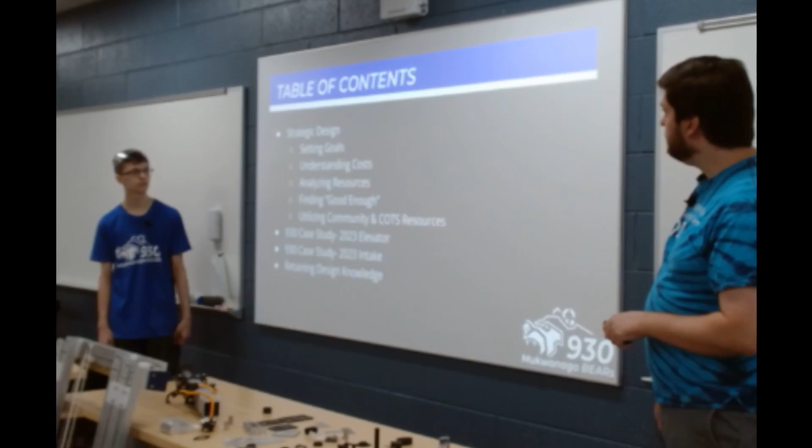So first we're going to talk about what is strategic design, how you can set goals and understand the costs of these goals. Also, analyzing the resources your team has, finding what is good enough for your team, and then how you can use community and COTS parts. Then we're going to dive into a case study on 930's 2023 elevator, and also the 2023 intake. And then we'll wrap it up with how you can retain design knowledge for future years.

Can you guys hear Aylin in the back? Just making sure. Okay, I have bad ears.

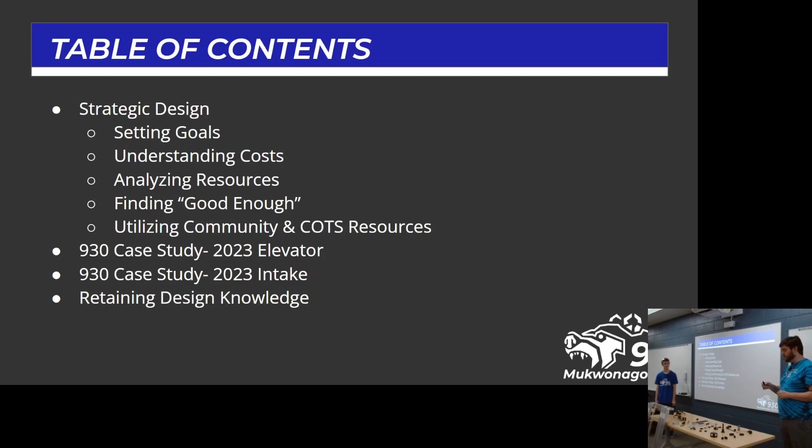Before I go on here, there are a bunch of strategic design presentations out there. Mike Corsetto from Citrus Circuits gives a really great one, and we're kind of going a little bit different than that one. We totally recommend you guys go check out the one from Citrus. This one is a lot more about the process around it.

All right, so strategic design - what is it in the context of this presentation? It's about bringing the right robot to the field. What that means is different for every team. As a team, you are going to be setting goals for what you want to achieve this year. Do you want to have match performance? Do you want to have award performance? Do you want to find that niche as that third robot? Setting these goals as your team and then performing, and then bringing that robot to the field.

It will require an in-depth understanding of your team's resources and a strategic application of those resources. Every team has got things that they're really strong at and things that they need to work on. We'll talk a little bit about some of ours later on, but understanding those and being able to apply them appropriately for your goals, and then managing and evolving priorities based on the now of your robot.

So what this means is every point during the season, the priorities are going to shift for your robot. Every day, things change based on what you learn about your robot that day. I've been saying that part of the build season process is almost discovering the robot that you've been building, understanding what it can do, what it's having trouble with, how it can be improved.

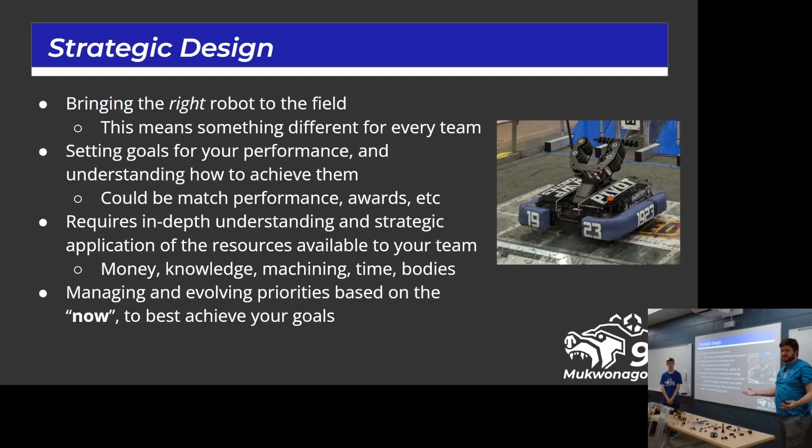Making sure that your robot is moving forward as a whole unit - it's not one-sided. You don't have a ridiculously good intake, but your drivetrain isn't assembled yet, or vice versa - your drivetrain doesn't have awesome auto routines that are fine-tuned to the perfect level. You've got it in 13 seconds, and it has nothing on top of it. It's just a drivetrain. You've wasted a lot of time fine-tuning autonomous mode when it's all going to change in a week when the top half of that robot gets attached. It's about making sure this robot grows as a unit.

One of the first things you have to do is set goals and priorities, and those goals are the guidelines your team will follow and make decisions by. You need to set them as a team and commit to them.

A way our team does this is we have a goal retreat at the beginning of the season, and our leads discuss what we want to accomplish. Before the 2022 season, we decided we wanted to go for the Autonomous Award to complete the hexafecta of the robot awards.

As a result, our robot was very heavily focused on autonomous. We had a bunch of sensors, a lot of focus on our autonomous routine, and metal sensors on our elevator to make it fully autonomous. All of those things allowed us to eventually get the Autonomous Award.

Those goals will drive your priorities. Like I said, going for the Autonomous Award, you're going to prioritize different things on your robot. That will shift at every point in the season, every single day, every single moment, and it will eventually bring you closer to those goals.

Every goal you make is going to have a cost - it could be time, materials, money. You have to balance those things. You also have to wonder if you spend time or money on one thing, does it prevent you from doing something else? Understanding those costs is very valuable.

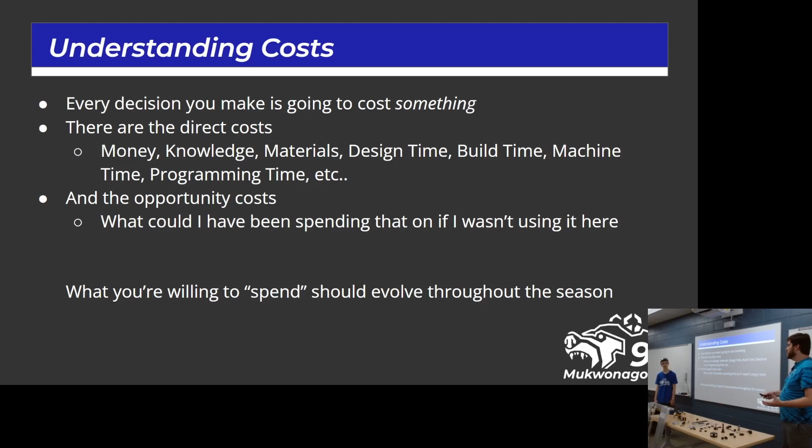Elon's talking about the concept of opportunity costs. If you have your lead designer spending all their time working on designing an ultimate drivetrain, could that lead designer be spent better elsewhere? Especially with the advent of swerve drive, the drivetrain has actually gotten a lot simpler to design - you make a square, plop those modules in the corners, and you're done. But things that are different every season require more experience behind the designer. So where is that opportunity cost you're approaching?

Analyzing your team's resources and application of your resources will define your team's success. Understanding your team's weaknesses and developing strategies around them is one key skill to bring yourself closer to success. I'll use our team as an example here.

For about 9 seasons, we built out of a church basement. Our largest piece of machinery was a drill press from Harbor Freight, and the chuck kind of wiggled when you tried to drill holes, so we couldn't do anything accurately. The first few seasons were interesting.

So we decided to put our focus behind our CAD. To enable this, we found a sponsor in Waukesha that would fabricate sheet metal for us. We could send them stuff and they had a 5-day lead time - we'd send CAD on Monday, and usually by Thursday or Friday we'd have parts in hand. 5 days in a 6-week build frame is a long time.

For context, this was back when you had to bag your robot. So you got kickoff January 6th or whatever, and like February 21st, something around there, you had to be done with your robot. So 6.5 weeks.

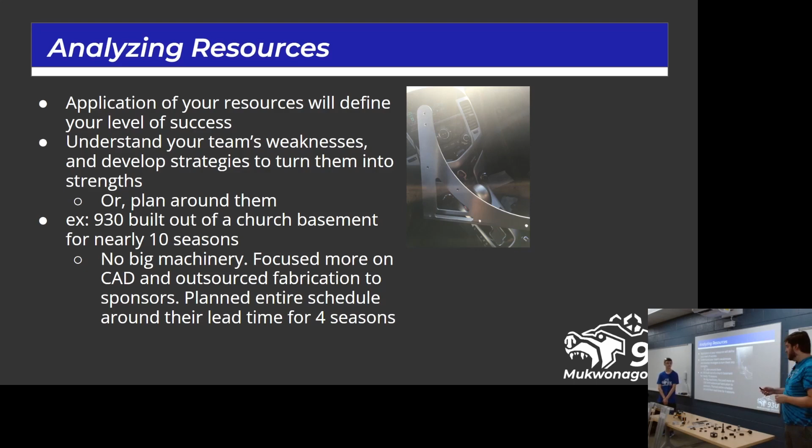This was end of day Saturday. We had to basically scramble to put this robot together because parts needed to be sent out the following Monday - so basically 4 days after this for the final robot. We had to assemble this thing, put it together, and test it to make sure we did everything right.

2017, we didn't - 2017 is kind of why we shifted off of this. It was the wiffle ball year, and the CAD for the wiffle balls was bigger than the wiffle balls actually were, and nobody on the team verified. So we put the robot together, went to put a ball through it, and just nothing touched - no compression on anything. This was end of day Saturday.

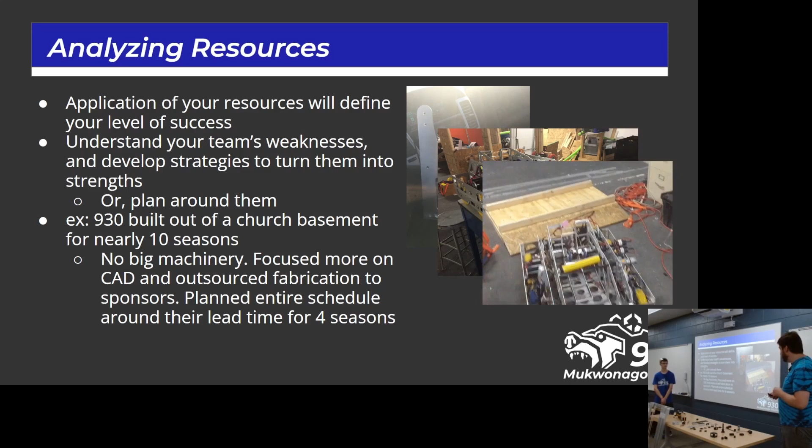We met again that next Sunday, the next day, as well this year, getting it driving and testing it. 2016, if you're not familiar, was a lot of just driving over weird things.

So this was Sunday, we sent out parts, then that next Monday there wasn't a lot to change. Back then we powder coated our robot, and that took another 5 days of lead time. So if you're keeping track, we sent out the full robot Monday of week 4.

We found pictures, didn't put them in here. We got the powder coated parts Thursday of week 6, so basically a week to build, assemble, and bag that robot. Back then, the competition robot never got tested before competition.

It went in the bag, wired, and we opened it up at competition and hoped it was actually wired. This is an example of how our biggest weakness was tooling - we just didn't have the tools to make anything well. So we shifted a lot of our priorities into CAD. These days we have access to a lot more tooling, but that shift from minimal CAD to full CAD has changed the direction of everything we do here.

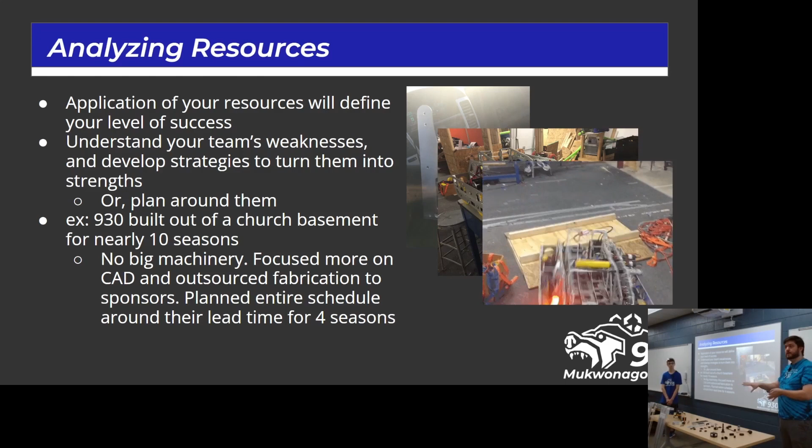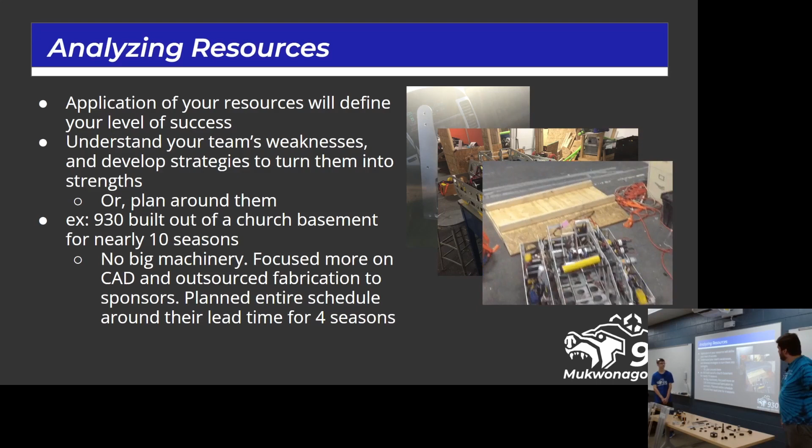So if you take a totally tangential thing from the side - CAD your robots. This is the slide I swapped, so now it's yours.

Like Greg said, if your team does not have the capabilities of fabricating your own parts with accuracy, there's a lot of options out there with commercial off-the-shelf resources. There's, for instance, ThriftyBot - they have components you can purchase with much higher tolerances than you could probably machine. Whenever you're creating a part, you have to ask yourself: is it more worth it to purchase something, or is it cheaper and do you have the capability to fabricate it?

There's tons of resources. There's the EveryBot, which we'll cover in the following presentation after this. FIRST is doing a kit of parts robot next year, and there's also a ton of kits - climb kits, elevator kits, turret kits.

Things Alan talked about before - understanding where you're spending your money, your opportunity cost, where that lies. A big part is cost. There's an elevator kit they sell, and we'll talk more about that because we utilized it this year.

Another part is, like us back then, we had a lot of tolerance issues with the chuck that wobbles, hand tools, and everything. These days, a lot of these companies sell things that allow you to have tolerance issues but still make parts with a nice tight tolerance.

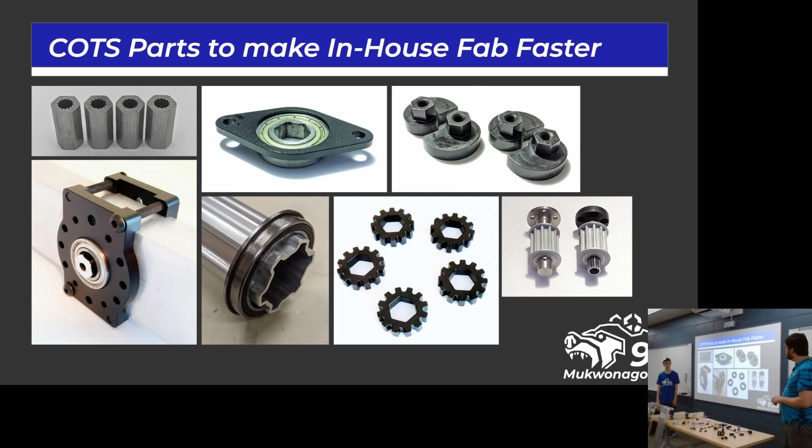Alright, so a big component of how we operate as a team in terms of decision making across the whole thing is finding that 'good enough' at every stage of the build season, every stage of the season. This is a concept of not going too far too soon.

At some point you're going to have to choose between continuing to optimize a feature, like an autonomous mode or an elevator speed, versus moving on to something else. Learning how to determine when something is good enough now, and that you can improve it later, is an important skill - because there's always going to be something you can improve on, but the gains you get are diminishing returns over time.

This is where we start to have some audience interaction. This is fun. When should you stop fixing what broke in the last match and make sure your robot gets to the next one? So in 2019, we showed up to Midwest Regional, our first event.

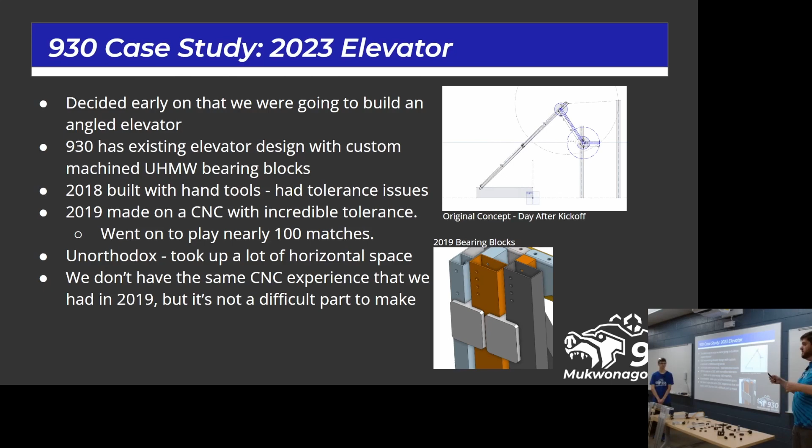So if we were going to make this an angled elevator, we had to figure out, is the plastic going to hold to the forces now being against it? Or are we going to use a COTS solution? Because this year, lots of COTS elevators came out. Thrifty has them, Rev has them, West Coast has them. Everybody has elevator bearing blocks now. AndyMark has them. What do we do?

So for our elevator, we decided the cost was low, the design time was medium. We didn't have any inspiration other than ourselves, so we'd have to figure out and consider how everything's going to act at a 45-degree angle. Also, the space cost was pretty big for this because it's all horizontal, way wider than most elevators.

Machine time had a lot of risk with it, a lot of potential to be way too high because, again, the student who worked on it graduated and has moved on to other teams, better teams, and the mentor is now in California, not over here to spend all his time solely focused on the Haas. So the machine time is risky.

Elevators just need to work, right? They are like a support piece of your robot. They're like the drivetrain, they just should work. They shouldn't be temperamental, they shouldn't require a lot of time and commitment. They just need to work. So we kind of considered it high risk, low reward.

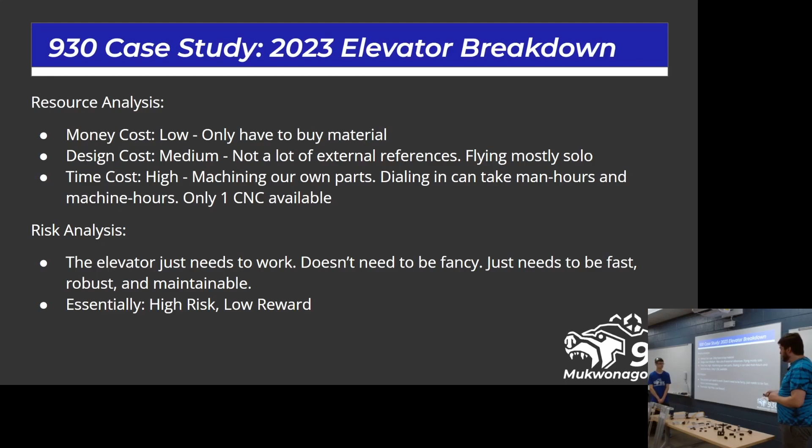So we kind of went to a middle ground. We decided to still design our own elevator, but use COTS bearing blocks. We ended up using the Thrifty ones, which I'm noticing now he actually didn't send us any besides what's on that. So that's cool, I guess. No, it's fine, I'm just joking, if he's watching this.

So we decided to design our own. We ended up modifying them a little bit. The robot's not in here so you can't see, but we wanted to have an open top and an open bottom to our elevator instead of all these cross beams that you see like on this one and on that one. So we decided to just basically add little struts.

Ooh, don't touch the smartboard.

That fully contains the elevator. But that allowed us to basically get the elevator just working and focus on more important things. Let's see if this still works now.

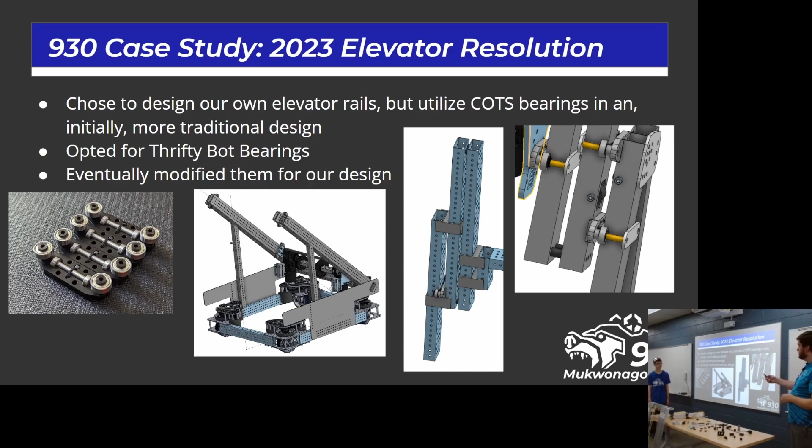Cool, all right, part 2 now, and this is more audience interaction here.

So it is February 11th at 6pm. For all the Wisconsin teams in here, this is a week before Sussex, this Saturday. Sussex was February 18th this year. So for our Illinois team, and I think that's the only one in here, Sussex is our week 0 competition. We have a week. The electromechanical team has dropped this robot onto the practice field and said, all right, this is yours, programming, have fun with it.

And it's there, and so there are a bunch of things. And so this list that we've got over here is kind of the things we need to do now. We have a week to do them.

We need to find all of our positions for intaking and scoring. If you've seen our robot this year, it's complicated. It's got 3 degrees of freedom, which a lot of you guys do, so you might know - elevator goes up, arm goes up and down, wrist goes up and down. We have to verify all of the positions for all of those. We have to make sure they don't run into each other while they're traveling - no safety on this robot. We need to make sure that this intake works.

We need driver practice, because driver practice is one of the core tenets of success. A faster elevator is a better one, another core tenet - if your elevator is faster, you just have one less thing to worry about. And we need to find the weak points in the design so they can be fixed. So basically, we need to verify a bunch of things, we need to drive a bunch of things, we need to test, and we need to break a bunch of things.

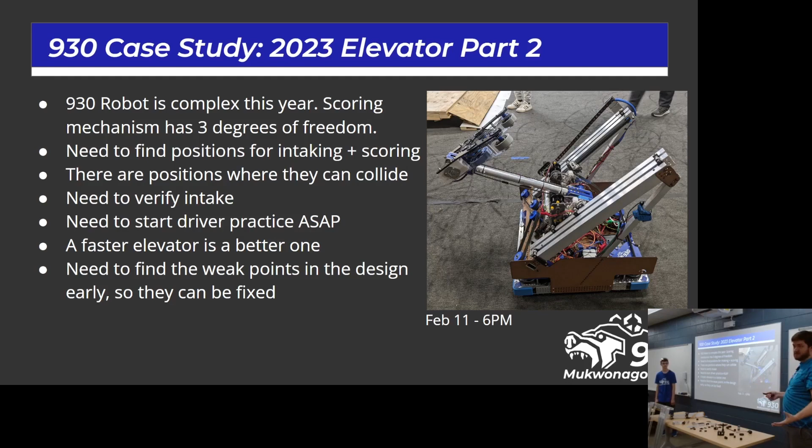Finding positions - okay, you got to verify your positions. The second part of this is programming has had this robot already. They've got logic there, but they have no PID yet. They know their PID will work once they put in the correct values, and they don't know what those are.

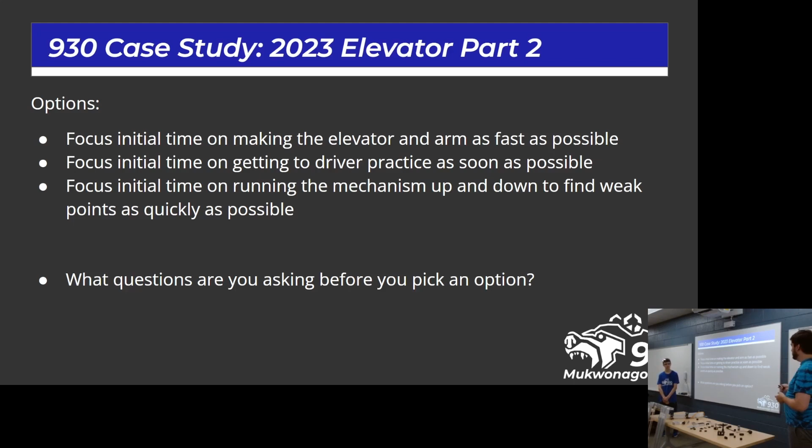So factors we considered, and I've got a bunch of pictures next because this will actually be fun. When in the season is it? Because that list never changes, so at this point you figure out what's important today, not what's important tomorrow. For example, it's not important today to make that arm go as fast as possible—it's going to break, like Jeff said. That robot is going to change significantly, and PID tuning is sensitive to big changes in your robot. So if there's big changes, don't waste your time.

How do we be competitive at our next event? In this case, our next event is Sussex. So we just need to be enough to be competitive at Sussex, which really means we need to get value out of Sussex.

The word will change for your week 0. Really, for week 0, it's how do I get value out of being there? If the robot just goes there and you're fixing it the whole time, you could do that at your shop. So we want to prepare to not have to do that. How much do we want to learn before we break it?

When do we plan on iterating? What do we plan on iterating on next? In this case, we planned on that intake. That intake was our biggest question mark, and we need to know: is it changing, is it staying the same, and what upcoming changes are going to invalidate anything we learn now? That's kind of the idea of, if that top half is changing, don't waste time PID tuning.

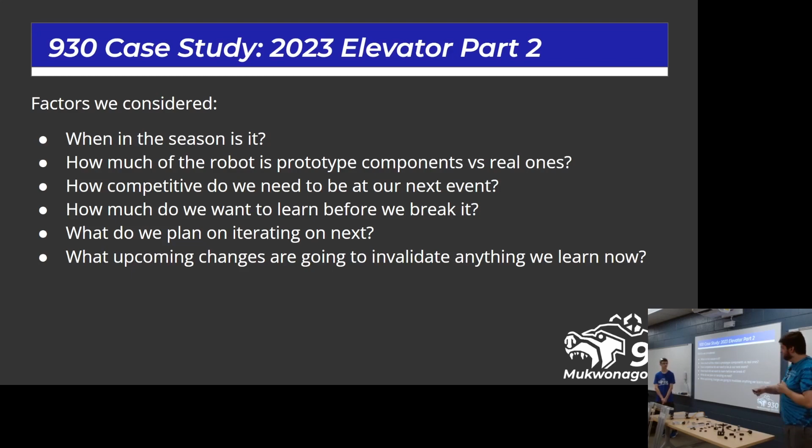I've got some pictures. So like I said, February 11th, that picture was taken at 10 p.m. There's about 2 times a season we meet a little later than usual. One is when we're at big milestones like this. The other is before Sussex.

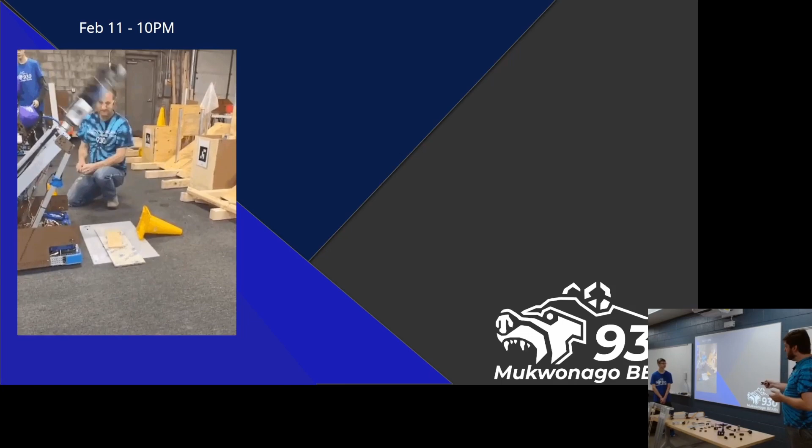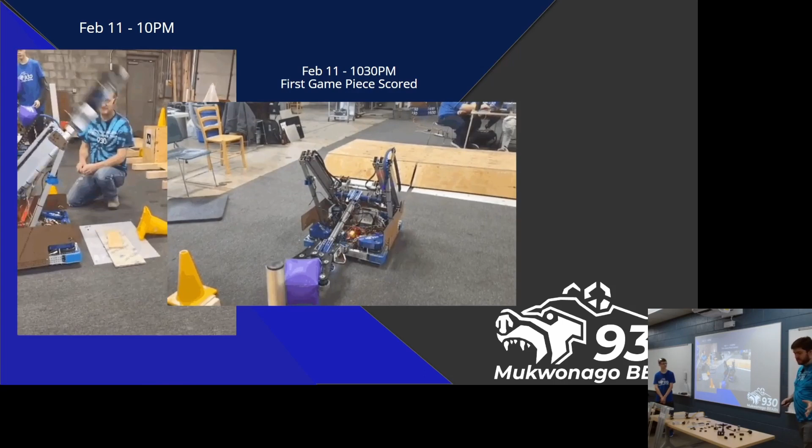So at 10 p.m., we started finding PID values. It went really well. About half an hour later, they actually found them—good enough for what was needed today.

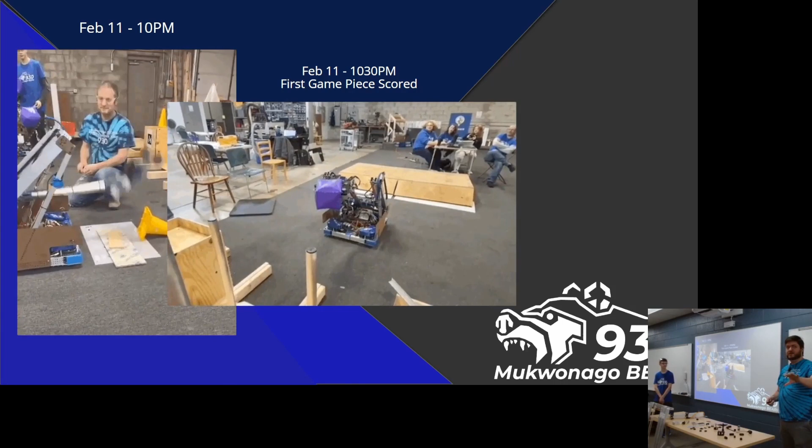So for Sussex, it needed to be able to pick a cube off the ground and score it without Brian running up and putting the cube in the intake, right? Because you can't run on the field at Sussex. It drives, and it's going to score it.

I promise this isn't going away. Here we go, watch Brian. He's going to get so pumped. This is the first piece it scored.

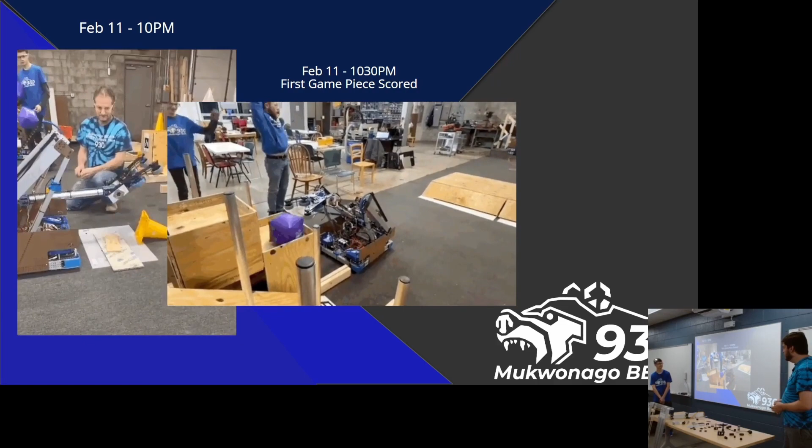And then half an hour later, we're like, okay, it scores—let's get driver practice.

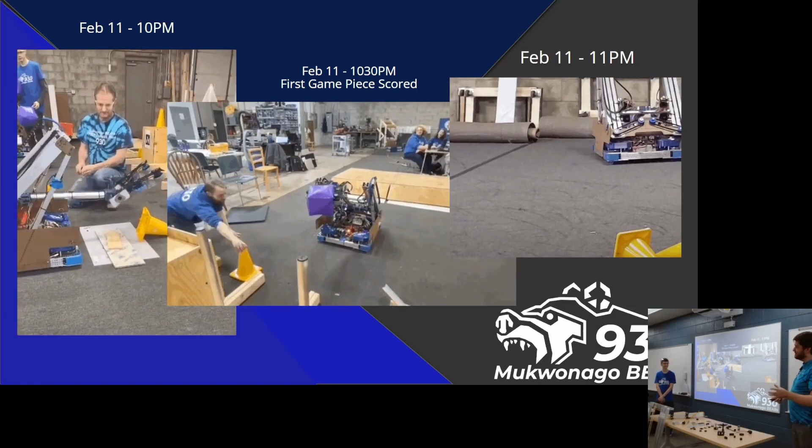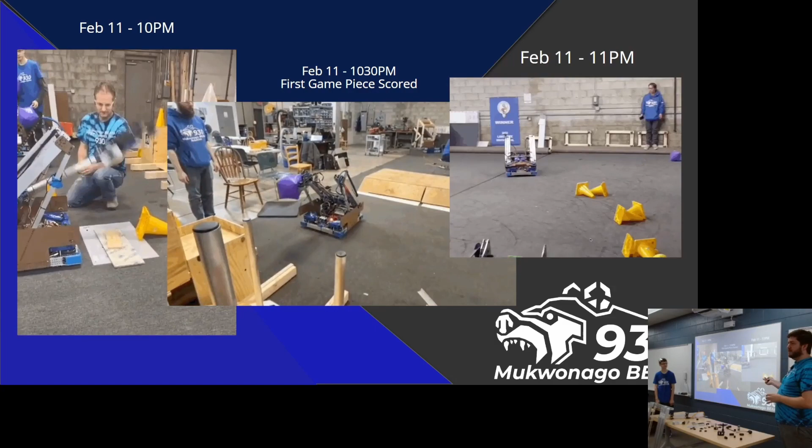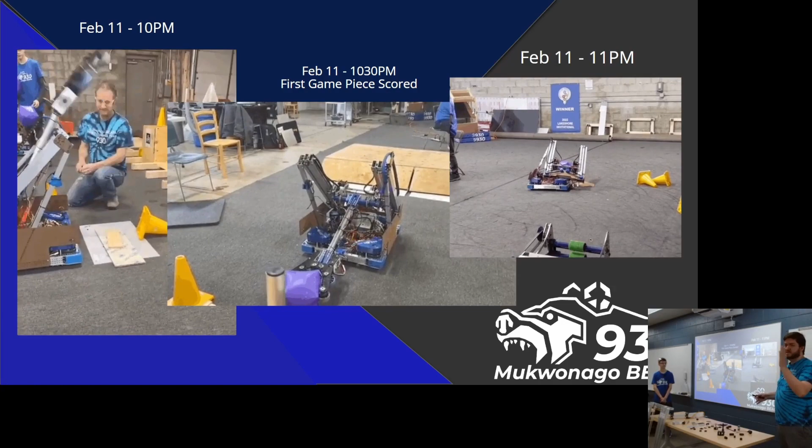Those giant pieces of cardboard lasted about half an hour while Ryder tried intaking pieces. But really, this was driver practice, and this was also validating that intake. The reason he's doing so much shaking is because that intake had to be so perfectly aligned that he was having to strafe like this, and it became a harmonic—it just kept going and got bigger until it snapped. The GIF goes even longer; I cut it off, but there's a great picture of our program manager giving the Jim face, where she just turns to the camera and stares.

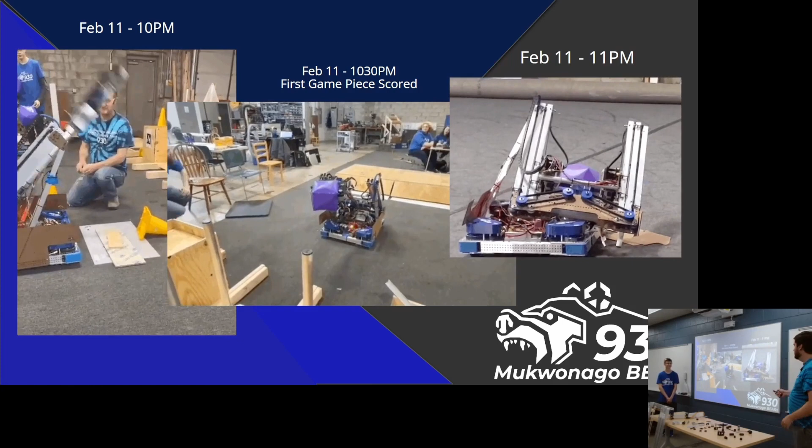So, okay, we figured that out. We know that we need to fix the prototype parts, we know that we need a new intake. We know a few things, but either way, 7 days later—alright, it's kind of hard to see.

So this GIF is just showing that everything is still really, really slow. Okay, so what is our next priority now? We're moving the robot forward in an equal kind of path. Everything is growing together—mechanically, it is at a better place now, so we need to make sure that programming is at a better place.

So the next thing we did was make sure—because we're preparing now for our week 0 where we need to get value—that it can actually score. It doesn't need to score fast, it just needs to not explode every time it moves.

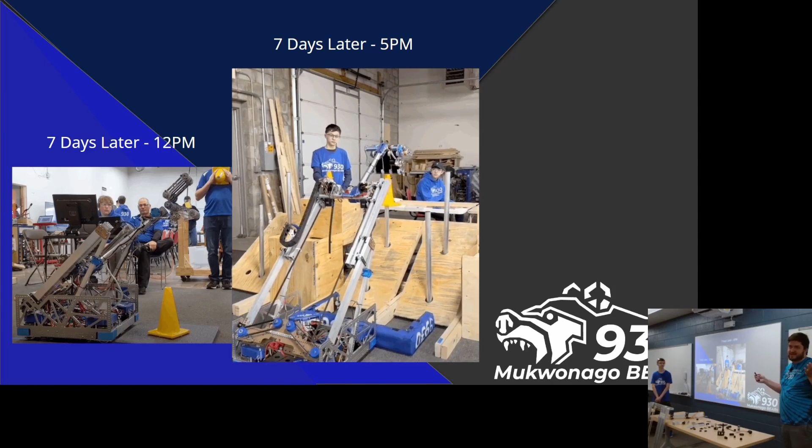Okay, and so yay, look at that—Aylin's super pumped, that's excitement for Aylin. Super excited because it scored, and it scored high. Everything moved, it went up together. It didn't do it perfect—it would automatically just spit out the game piece about half a second after it reached there. So if the driver wasn't there in time, too bad, but good enough.

And then a couple hours later, like, alright, full system test, make sure everything works. Yay, it moves slowly.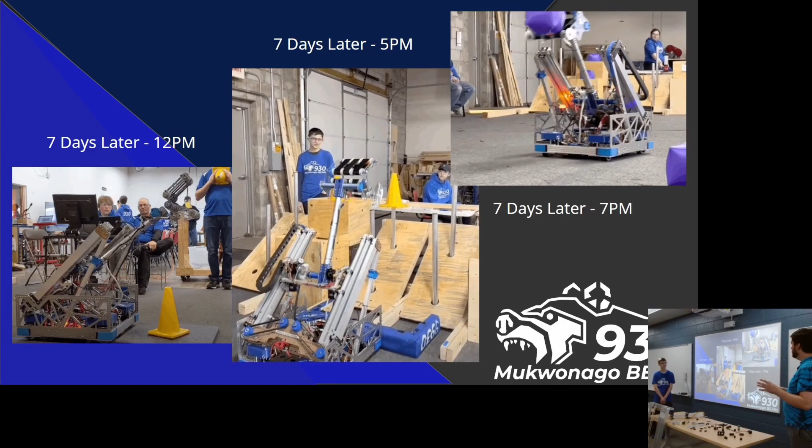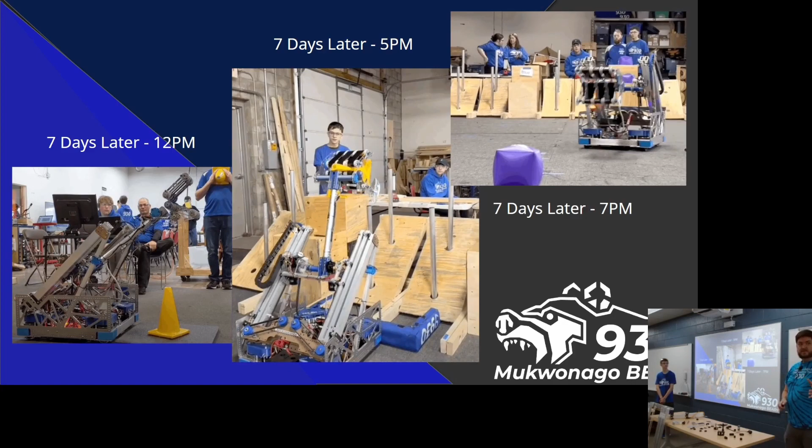I didn't slow anything down. You can tell by the signal lights, because sometimes the frame rate is different. But the full system test now is just to prepare to get value out of Sussex. So everything worked, it's great.

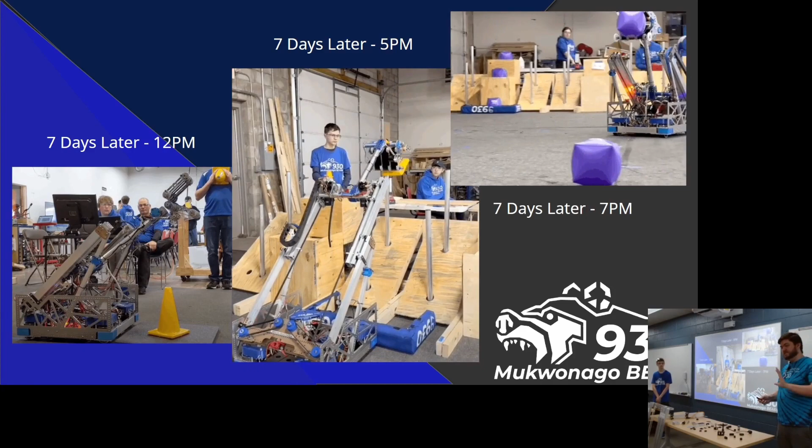And so this now progresses through the entire season. You have to keep your priorities spread out across your robot and moving forward in lockstep. You don't want anyone getting out ahead.

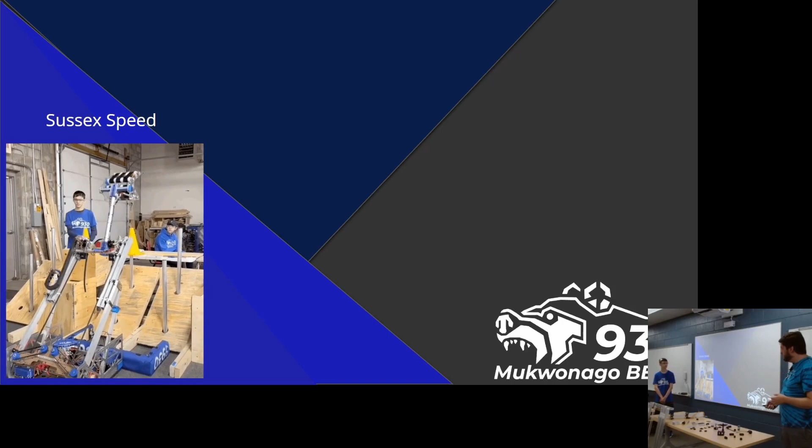One example of how these priorities shift together is this GIF, this is the Sussex scoring speed. It was good enough for Sussex. What did we need at our first competition in Midwest? After we came back from Sussex, we said that's a little too slow, so we basically doubled the speed of everything here. Still kind of slow, but good enough for week 2.

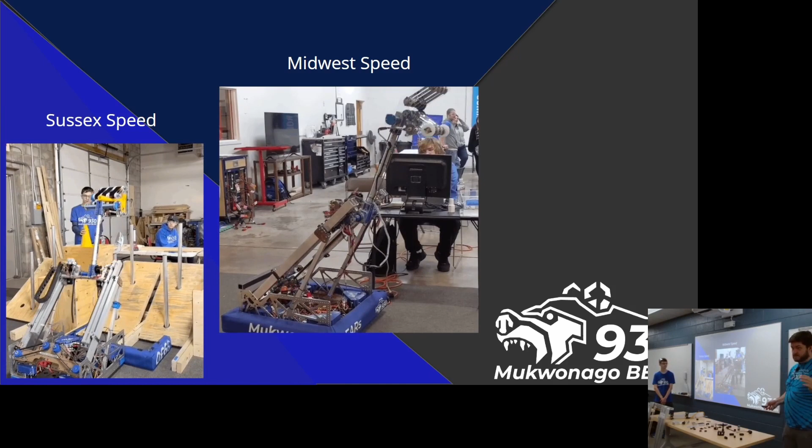We came back from Midwest and decided that was still kind of slow because there was tough competition, and tough competition's only going to get harder throughout the season. So we decided on Wisco speed, where again we just doubled it. But it was investing time in PID tuning, which is not a simple process. You can't work on the robot while that's going, especially with an elevator, you're going to lose hands. So it's just focus time for PID tuning, but it was necessary to keep the robot moving forward together in competitiveness and in reaching towards our goals.

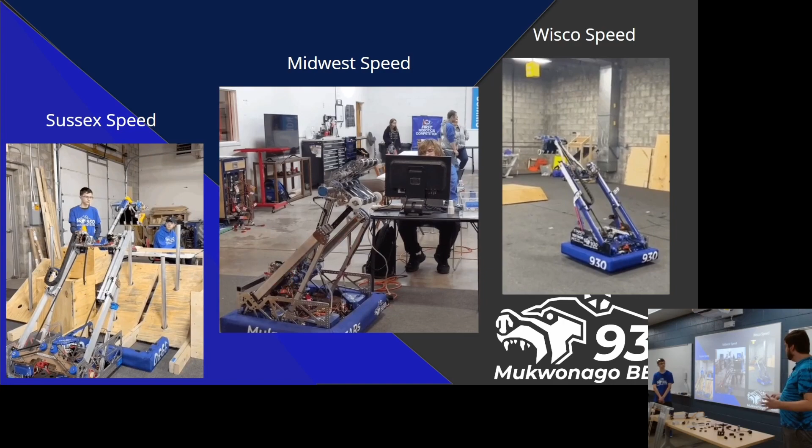I think that's my stop on the elevator. Now Aylin gets to talk. It's the down arrow. Down arrow, yes.

Okay, so now let's take a look at the 2023 intake. This is the ground intake, separate from the one on the arm. We wanted something that would be compact, out of the way of the elevator, and allow us to pick up game pieces from the ground. Our original thought process was that we wanted to pick up tipped cones, flip them up, and bring them to our manipulator where we could then score them.

We had used 4-bar intakes in 2022 and 2020, so we had experience with that type of mechanism. We'd also gained experience using a motor to extend the intake versus pneumatics, since at this point we had no pneumatics on the robot, so we wanted to stay away from that. We also knew that since this was a completely separate mechanism, if something failed with it, we could still rely on the rest of our robot, which meant we could iterate throughout the entire season.

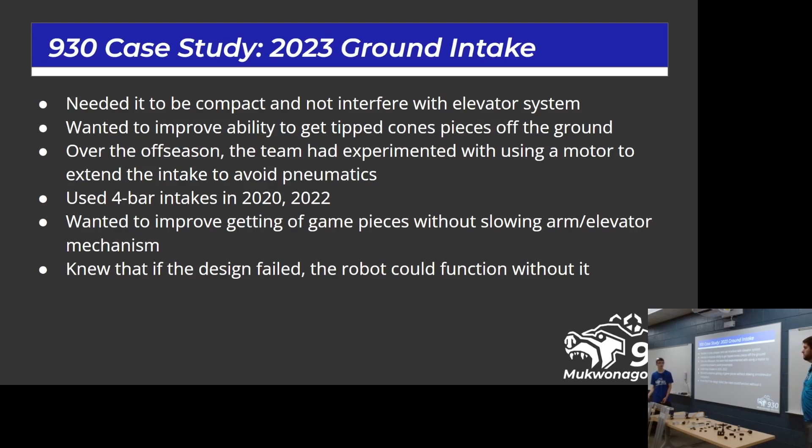We had a couple of issues with this that we noticed. It took a lot of torque to move the cone, there was a lot of force on that Neo, and it took a lot of programming and driver inputs, and we didn't have the time at that point. This was around week 1 of competition, and we also realized it was too complex because you had to worry about extending the intake, rotating the rollers, running the rollers, and adding current detection.

So we decided to pivot to something that was simpler, but still as effective. This was prior to our first competition.

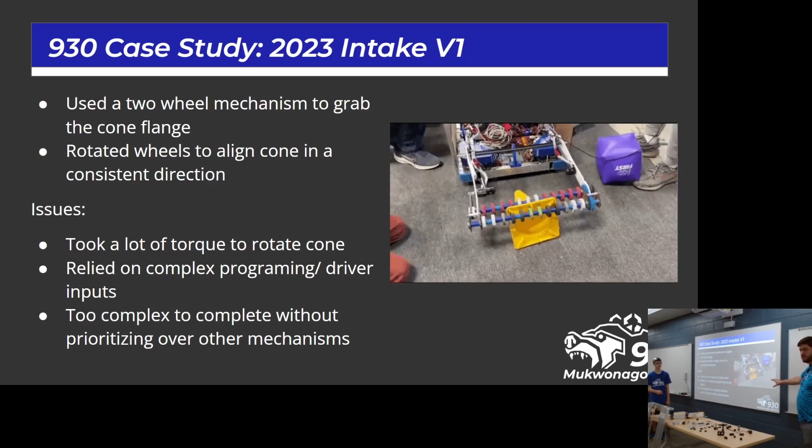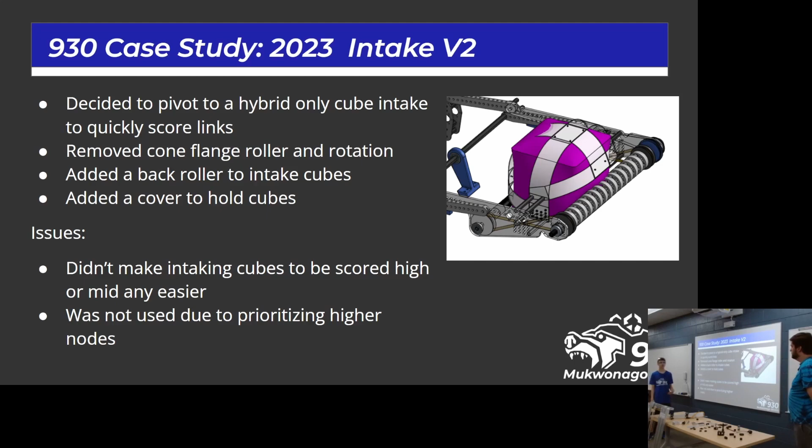If you paid attention, I think we used it for two practice matches at Wisco before we came to the conclusions just discussed. And because we were prioritizing those higher nodes, this never got used, and we wanted to be able to still use that space.

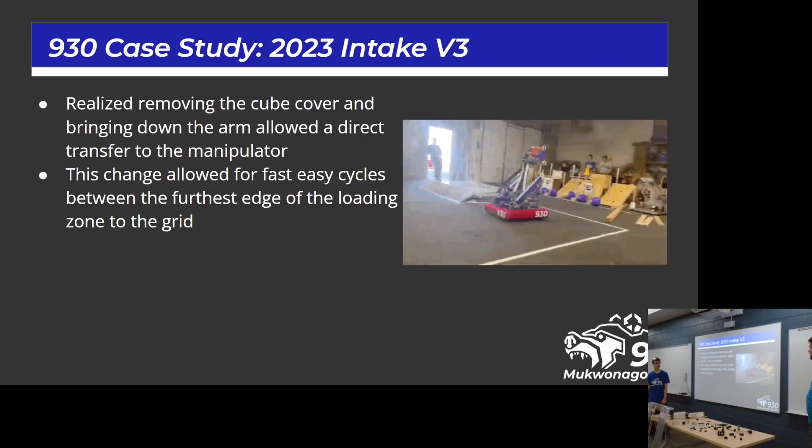So what we ended up implementing it for was for champs, and we removed the cover of the intake to allow a direct transfer between the intake and the manipulator. We'd bring the manipulator down and grab the cube, like you can see in that GIF there, and that allowed us to very easily pick up cubes from the ground right at the edge of the loading zone.

So we could do very fast cycles between the community and the loading zone. And we could still score them high, mid, or low. Kind of like we've been talking about here.

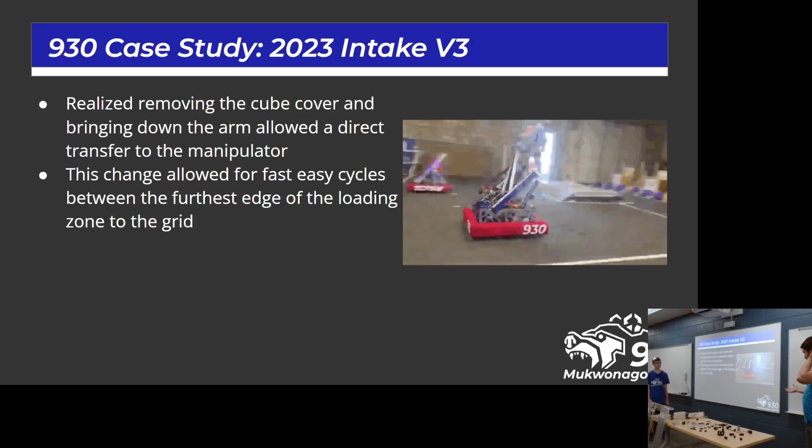So this video was like 2 days before we left for champs. The garage might be open because we were packing the robot or the rest of the trailer. I don't remember. Well, the garage isn't open.

But at every point during the season where Alan was highlighting the rest of the robot, there were things that were more important and a better use of our resources. The opportunity cost was too high to work on the ground intake, for example, like getting the elevator to go faster, getting more autonomous modes.

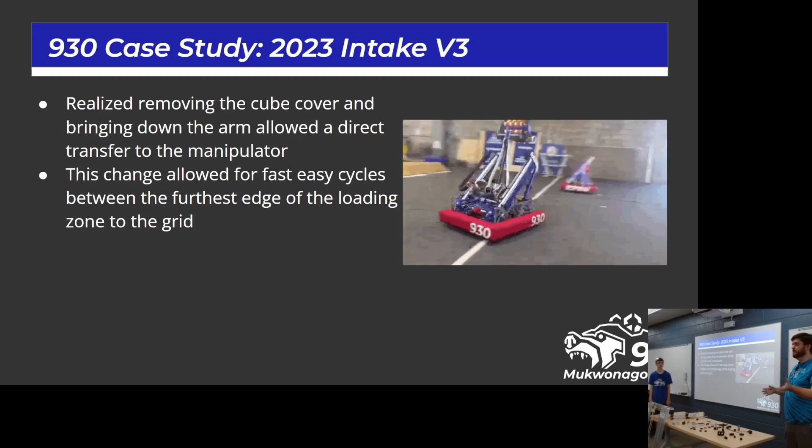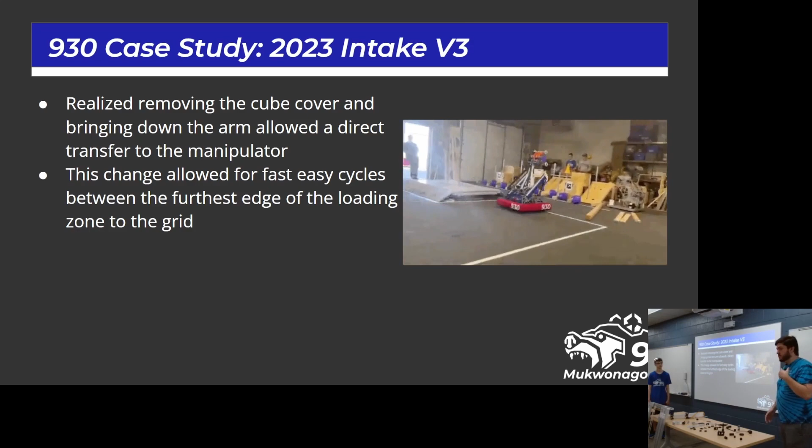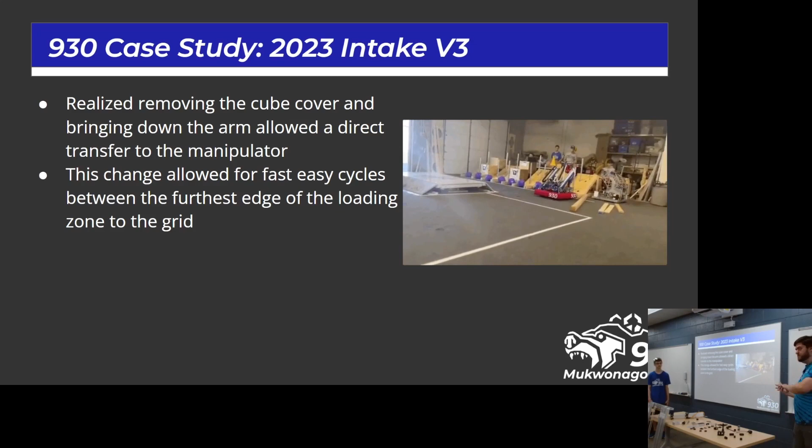Autonomous modes was the big one. We kind of neglected autonomous modes a little more than we should have at the beginning of the competition season. It wasn't until our 3rd event in week 6 where we actually had an autonomous mode we liked. After that, the diminishing returns of everything else were lower than this, so we actually had time to focus on it and figure out how to make it work.

So there were a couple of things we learned from this. Because it's a completely separate mechanism from the other parts of it, if it's not working properly, it's not as big of a deal, so you can continue to make changes to it throughout the entire season.

So we started with wanting to do floor cones, but then we transferred to hybrid cubes, and then eventually all cubes from the ground. We were able to do that and iterate because it was a separate mechanism.

That first cone flange grabber mechanism, probably if we had invested more time in it, it could have worked, but it would have taken a lot more programming, and we didn't have those capabilities at the time. So being able to switch to a simpler solution turned out to be just as effective in the long run. Honestly, if we'd had more resources, that initial design, in its final version, is probably the best one, but we didn't have the resources to make that.

You look at the highest level, it was always about picking up those floor cones, so you weren't waiting on the driver station. So hindsight now, it's like if we'd had the time and resources, that would have been valuable. But we evaluated what we had and what we could apply, and we were kind of behind the curve at every point until the very end. We're like, okay, this is good, but it kept us going.

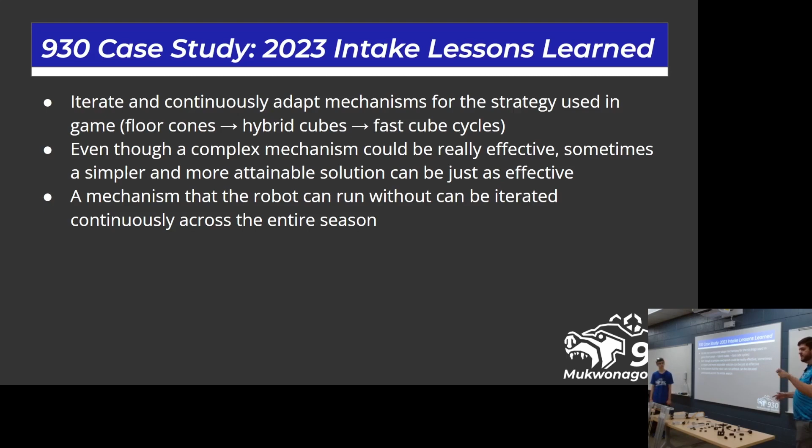And like Alan said, this part of the robot wasn't the essential part. It was kind of like an ancillary, nice to have. It's like the icing on the rest of the cake there.

Finally, we're going to talk about how you can retain design knowledge for future seasons.

So, of course, through all of our iteration, we didn't have perfect designs. The example I'll give is at IRI a couple weeks ago, the Neo 550 on our intake right here has a belt running to it to the roller. It sheared during one of our elims matches, so there's no shaft on it anymore. And it's fairly well documented that if you have constant tension on the belt, the Neo 550 can be very prone to shearing.

So we wanted to take a lesson and learn from it. We would learn from it, but also we wanted to make sure that future students and mentors did as well.

So what we did is we have a design review checklist. Before any parts are fabricated, the design is reviewed and they run through a checklist of things like: do they have the correct thickness in the material, do they have bearing retention holes, and is the motor in a good location. So what we did is we attached a presentation link onto the side of it, and in that presentation we detailed some of the possible solutions and the issues we had with that design, so that it can be learned from for future seasons.

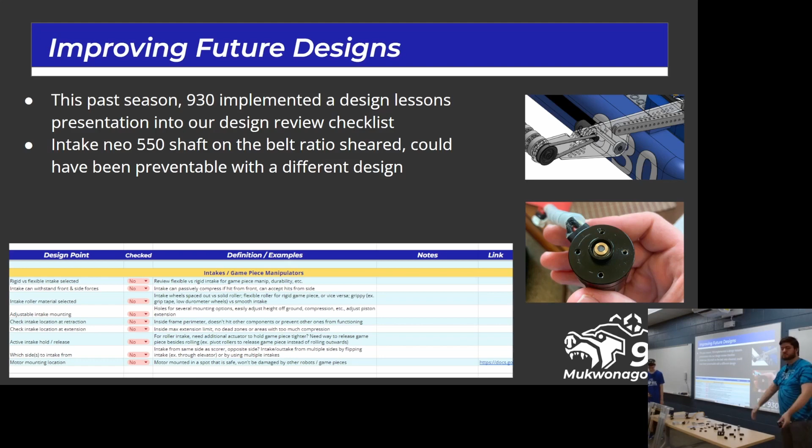So here's the presentation. You can see we have a description of the original design, then we talk about the issues we had. We said it sheared, and another issue was that electrically, when it was wired, the connection was soldered directly to the robot wires rather than having a connector. So when we needed to replace it between elims, we didn't have a way to quickly unplug the motor. In the future we're going to put connectors on all our motors so we can switch them out, and we put this here to remind ourselves. This particular issue, the connector being soldered, bit us twice — it happened at Champs in the first elim, and since we didn't fix it, it happened again at IRI.

Some other cool things here — he sent some things they're still working on, and I had no idea what the box was going to have. This little part is probably the most interesting thing because it's got a hole pattern that mounts to the back, it's aluminum, and it's got a fitting for a hex shaft. You put a bearing here, but that's probably your next failure point, since now you're putting a lot of torque over here. You'd want a bearing to capture the other end, but suddenly you've got a half-inch hex 1-to-1 on your little 550. That's kind of cool, the shaft just sticks out.

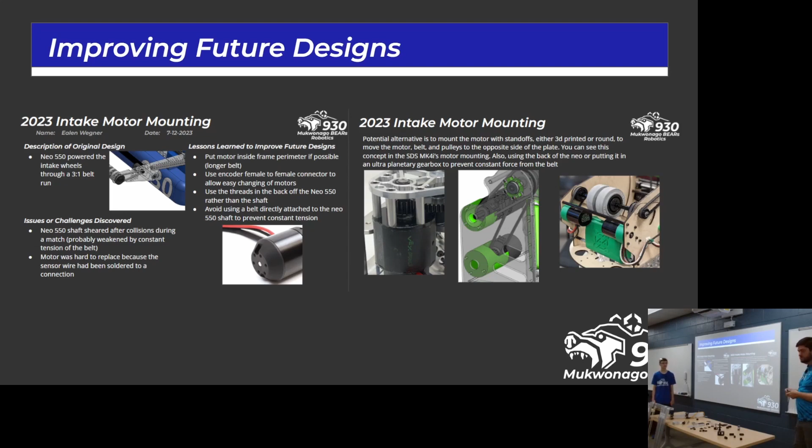In this presentation we also put some examples of what other teams did, so you can see where they had the Neo in a more protected position — they actually protected the Neo.

So in conclusion, strategic design will look different for every team. It depends on the resources you have and what goals you want to pursue, and those goals will change throughout your entire season, probably every day. You need to constantly decide what to prioritize in order to complete those goals. Community resources and commercial off-the-shelf components, like ThriftyBot for example, are really helpful — instead of putting extra engineering weight on your team, you can just purchase those components and be just as effective.

Yeah, so that's the bulk of our presentation. Do you guys have any questions? What time is it? It's not 9:30 anymore. It's also not even 9. Other questions? Cool.